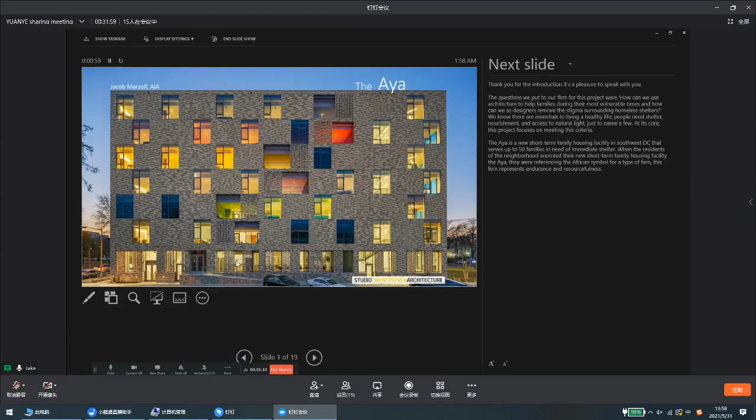The story of the AYA begins back in 2001, when DC General Hospital was closed and converted into a homeless shelter. It served upwards of 270 families each night. The oversized, rundown facility was continually plagued with security and trauma issues.

In 2015, the mayor of DC pledged to close DC General Hospital and open 8 new smaller facilities to collectively combat homelessness. Studies have shown that smaller facilities are more easily supported and integrated into a community, allowing residents access to local resources, including stores, healthcare, and schooling without significant travel or income.

Each facility would serve no more than 50 families, be equipped with all-inclusive services, 24/7 security, and provide a safe environment for families. In 2018, Studio 27 Architecture was awarded the Ward 6 project.

The AYA occupies a historically significant location in Ward 6, falling within the original master plan of Washington, D.C., mapped out by the French military engineer Pierre L'Enfant. The site is bordered by Delaware Avenue, one of the original streets of L'Enfant's plan that radiates diagonally from the U.S. Capitol. The relationship and proximity of the site to the Capitol played a major role in the development of the building's orientation, program distribution, and captured views.

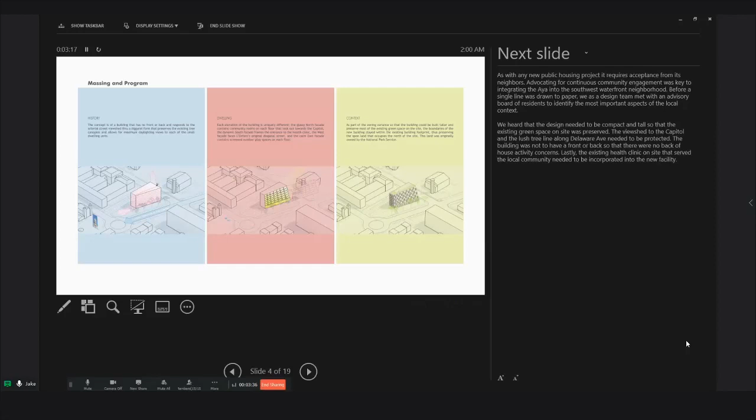We heard that the design needed to be compact, so that the existing green space on site was preserved. The viewshed to the Capitol and the lush tree line along Delaware Avenue needed to be protected. The building was not to have a front or a back, so there were no back-of-house activity concerns. Lastly, the existing health clinic on site that served the local community needed to be incorporated into the new facility.

The early input from the community was extremely beneficial because it gave us a set of rules and guidelines to work from. Instead of starting with a blank slate, we had an inherent framework to aid our decision-making.

We explored several massing concepts that aimed at meeting the criteria set forth by the advisory team. In addition to these rules established, each option looked at different ways of bringing in natural light while creating generous views to the city.

The massing concept that received unanimous approval from the community was a stepped ziggurat form. Each articulated block is a dwelling unit within the building. Each dwelling unit has 2, 3, or 4 beds per room throughout the 50-unit complex.

In these images, you can see the preservation of green space on site with the offset of the building at the north from the existing park, and the erosion of the western facade from the tree canopies along Delaware Avenue. This movement away from the trees results in a triangular footprint that points directly north towards the Capitol.

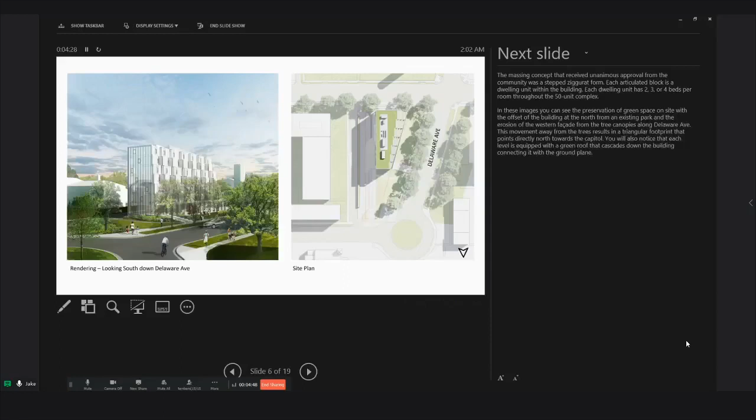You will also notice that each level is equipped with a green roof that cascades down the building, connecting it with the ground.

In the 4 elevations of the building, you'll notice each facade is distinguishably different. This is intentional. To meet the community's goal of not having a front or back to the building, we treated each elevation equally. The moves on each face of the building directly relate to both the program and exterior environment.

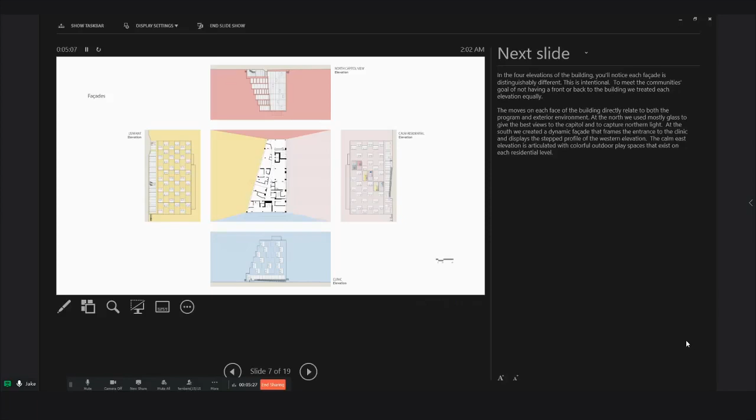At the north, we used mostly glass to give the best views to the Capitol and capture northern light. At the south, we created a dynamic facade that frames the entrance to the clinic and displays the step profile of the western elevation. The calm east elevation is articulated with colorful outdoor play spaces that exist on each residential level.

On the left image, you can see the northern facade, comprised of mostly curtain wall. The spaces at the north end are community rooms that serve each floor. They provide a common space for studying and relaxation.

On the right is a close-up of the western facade where you can see the corners of each dwelling unit. The glass locations alternate from an interior corner on one floor to an exterior corner on the floors above and below. This undulation creates depth at the exterior and makes the rooms feel larger than they are.

Here we are standing in one of the community rooms looking north to the Capitol building. You can see it here through the center casement window.

The height of the building grants some of the best views to the city. This room is equipped with a movable partition that runs down the middle of the space, allowing for separate activities.

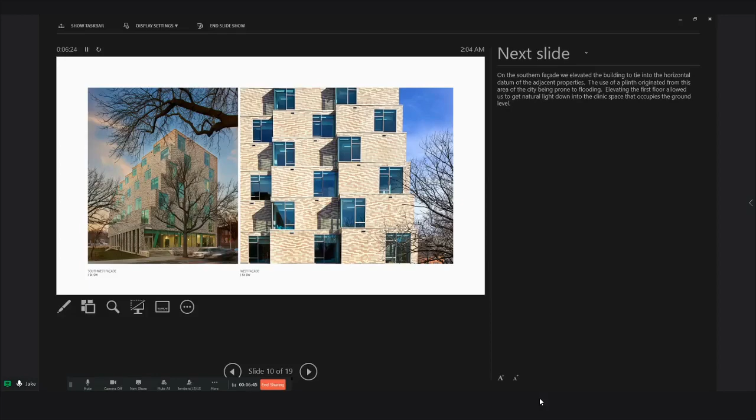On the southern facades, we elevated the building to tie into the horizontal datum of the adjacent properties. The use of a plinth originated in this area of the city being prone to flooding. Elevating the first floor allowed us to get natural light down into the clinic space that occupies the ground level.

We designated an organizing color independent to each floor to foster a sense of community within the building. At night, you can see these colors shining through.

Displayed in the longitudinal and transverse sections here, you can see the clear use of color as an organizer for each floor.

The clinic shown at the top left plan occupies the ground level. The administrative and support spaces for the short-term family housing make up the first level, and the dwelling units reside on the 5 remaining levels above.

The stepped massing from the 2nd to 7th level required a careful study of unit distribution, as there are fewer units as the building grows in elevation.

As mentioned previously, each floor has their own exterior play spaces carved out of the eastern facade. This allows for parents and children to get secure access to the outdoors without having to travel down and out of the building. The outdoor play spaces climb up the east side of the building diagonally from left to right,

drawing your eye north in the direction of the Capitol. The playful use of color is reflected through the openings of the exterior wall.

At each outdoor play space, we use brick screening to provide shade and wire mesh to provide safety. Each room has a colorful rubberized floor, stucco walls, and a glass partition along the western side that allows for natural light to reach each corridor.

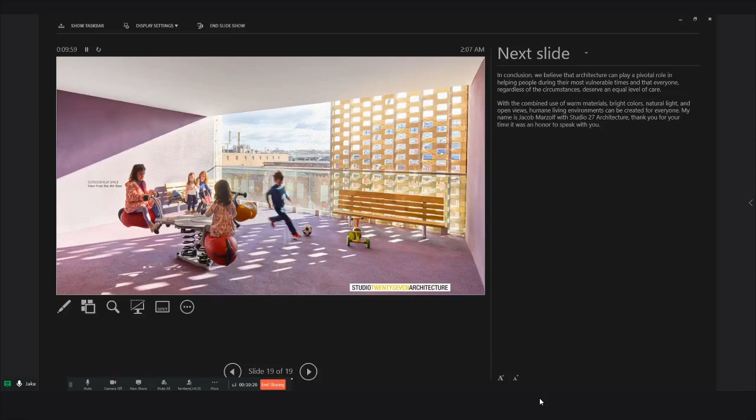Thank you, Jake. It's a very interesting presentation. I like the zigzag shape. It's perfectly fit into the site and creates very diverse public space. It's amazing projects. So let's welcome the second speaker.

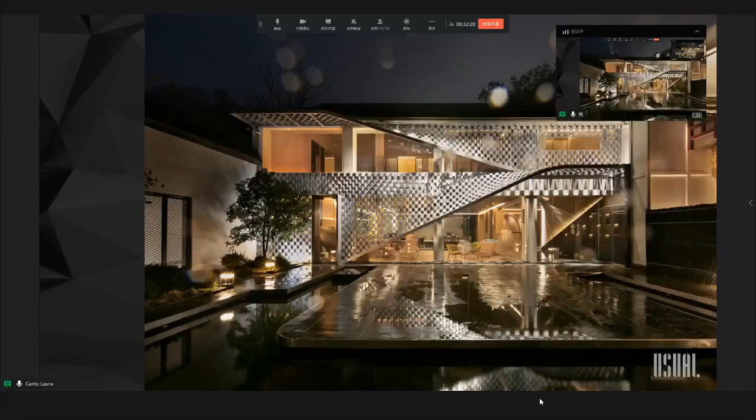So the flooring tiles are extended from the original tile roof to the whole facade. The new facade can be perceived from both the inside and outside space.

The facade works like a curtain, and at some points it's gently lifted, so the outdoor and indoor can resonate with each other. This is the facade image we generated, a half concealed, half revealed facade.

Walking through this exhibition hall, it feels like being in nature. This transparent floor-to-ceiling glass connects the outdoor landscape with the indoor space, and also this translucent

facade skin, composed of flooring tiles, filters the light from the southwest and also plays a role in shading. The interior is full of light and shadows, contrast and change. This was the intention of the design, that the sunlight and the scenery can blend and gather together

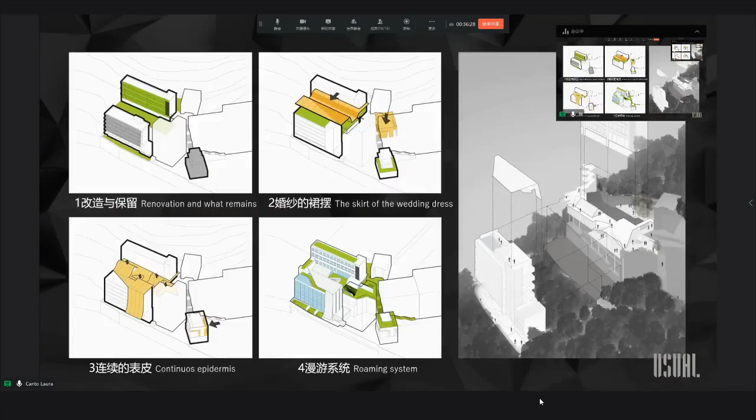give them a totally new look. These are some sketches of the concept, some diagrams showing how we generated the design. This is the entrance, which has become one of the most popular influencer hotspots.

There are some 3D printing models, and the lobby, the water yard, and the multi-purpose auditorium. And I think I'm off time, right?

So I will be quick. The other areas from this project, and the aerial view from the drone. These are some of the rooms that face the Yangtze River, and the rooftop cafe bar, the infinity pool, and some of the...

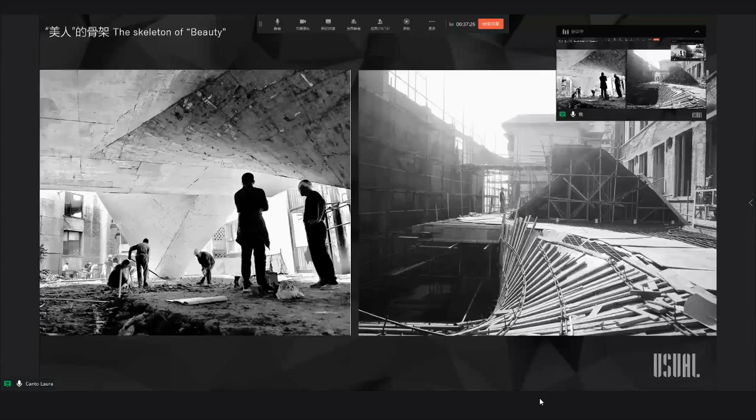I would like to have more time to explain this project better. The construction drawings, and below. Yes, thank you.

Thank you, Laura. It's a very nice presentation, very elegant design. I saw some of your work on the internet - it's quite internet celebrity, so I think it's interesting. I like your approach of using, for me, an unusual way to achieve a usual life. Yeah, maybe we can discuss later.

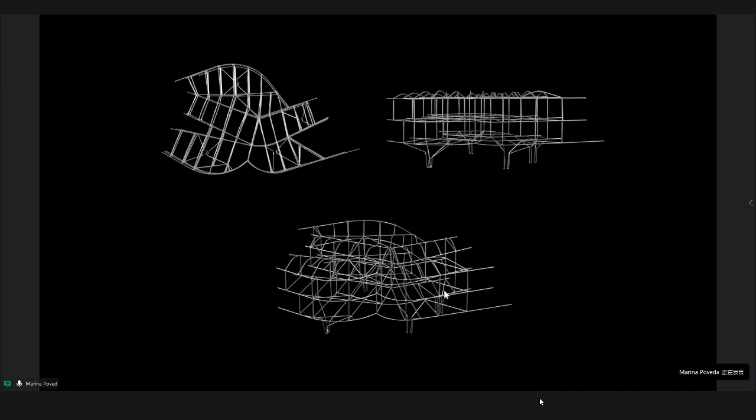Let's talk about the plot. Let's talk about the conditions and requirements of the client, and then let's see how the house ends up being. So let's think about the clients first. This is the house of two doctors who work in Besalú, a very small village in Catalonia.

The two doctors wanted the house to be approximately 200 square meters. They worked there and lived there, so they were not supposed to use cars to move around because it was a small village. I'm saying this because it has something to do with the whole project. I'm also mentioning the clients because their requirements were very important for the development of the project.

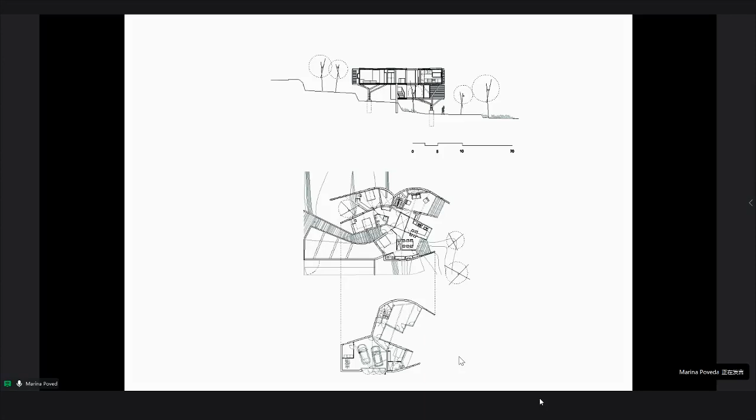Let's see this through models. This condition of the one-floor house had to follow a logical structure made of pillars. In this kind of model you can see the house, the way it searches the street and the village, and then it opens and flies over the terrain, just to be visually connected with the river, even if it's not literally connected with nature, with the ground.

Of course, this structure needed to be made with pillars, but it's true it has a mixed structure. Structural walls are used as well as reinforced concrete and steel pillars, and both of them were necessary.

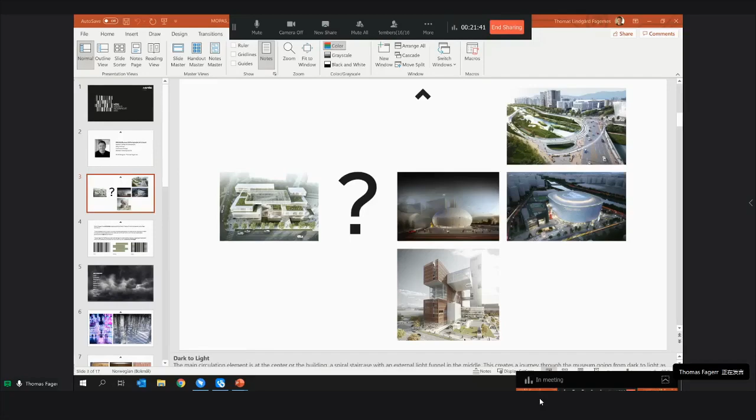Our initial thoughts were, should we compete with these buildings through shape, or should we do something else? That was our initial conceptual start, that we should not work with form here, we should work with light. Since this is a museum for photography, it is a story about light.

So we made a vocabulary directly connected to light, with expressions like contrast, reflection, blur. Blur became very important while we worked with this competition, and also the idea of a filter.

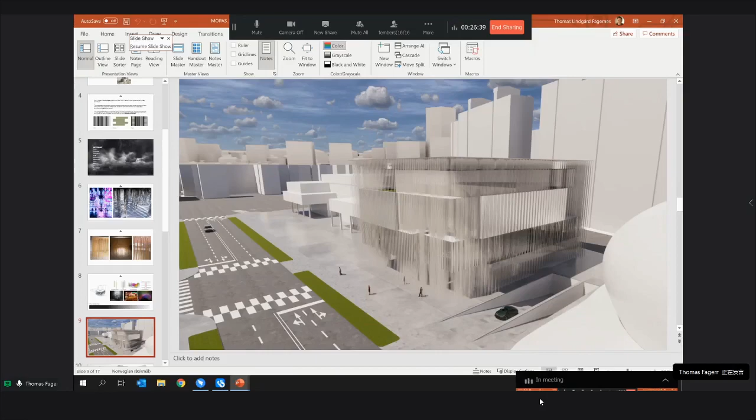So what we're seeing here is a sketch of the building as it turned out. We see then the programmatic part sort of inside this blurred volume of, I think it was 2,500 slim columns. And this is a more developed rendering.

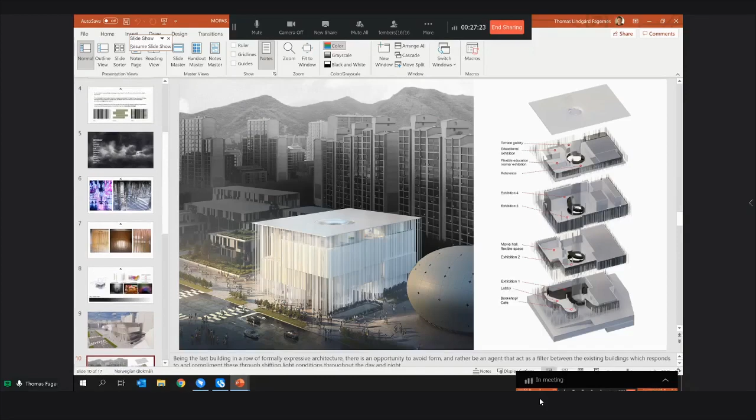Yeah, so here is the ground floor plan, where that funnel on the ground floor was an external space which connected this museum to the museum next door, which is this museum for robotics.

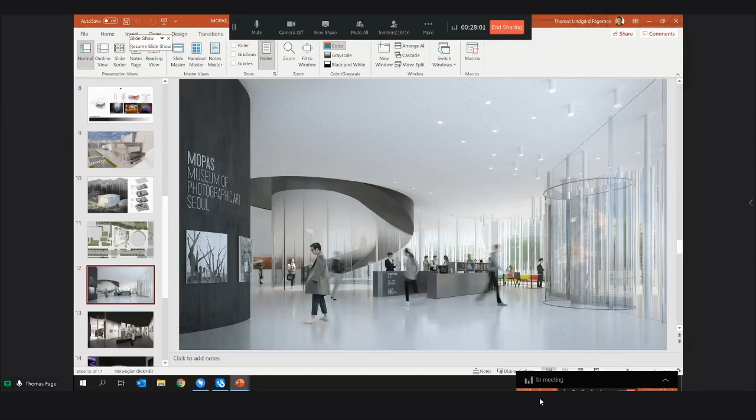And here we have an image of the entrance where we see the funnel coming down with the stair wrapping up around it. Right behind here we have the first gallery, so that's our black and white gallery on the ground floor, the low intensity of light gallery.

And as we get up on the second and third floor, we reach the digital content library, so intensity of light goes up and the intensity of the expression of the medium goes up.

And here we're on the top. It's light, it's bright, and these are student exhibitions and study halls, studios, and also a library dedicated to medium.

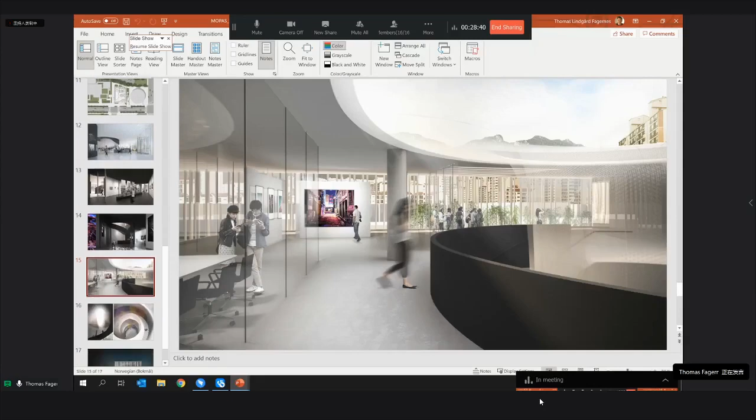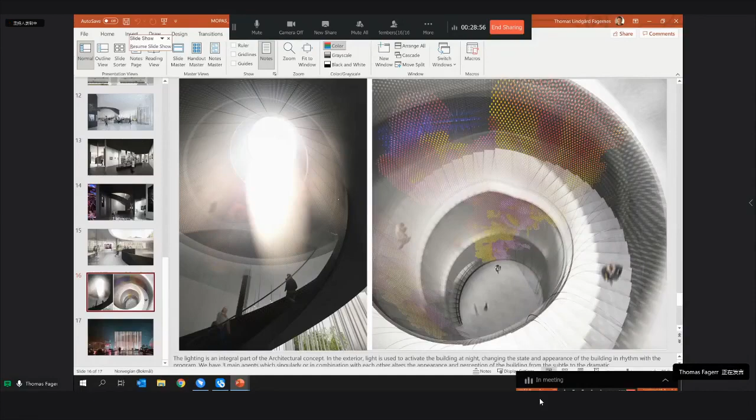And an image of this central funnel here, where Lichtvision also developed an inbuilt screen in the glazing, the inside of this funnel. And finally, this is our vision of this building at night, actually lit up by the columns and this three-dimensional screen by the entrance.

That was my last slide. I'm not sure if I've overrun my time.

Yeah, it's perfect. Thank you for your sharing. I think it's very good work to study, how the building works like a mediator between the city and the people. How actually architecture becomes more like a device, not purely like a building itself.

Maybe in future you can bring this idea to China to find a place to implement it. It's a good opportunity. More than happy to. All right, thank you very much.

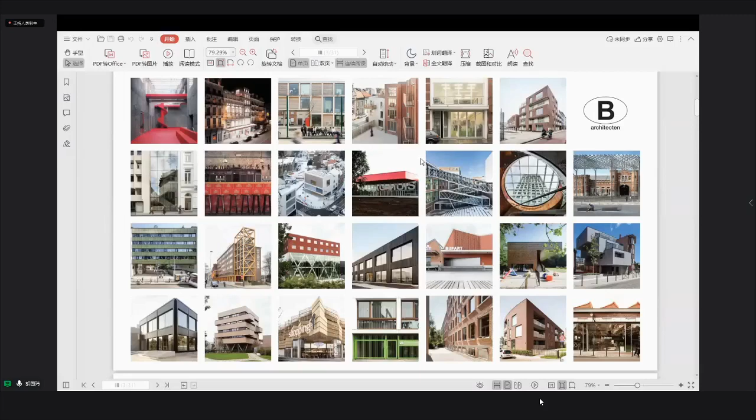You could say next, I will play the next slide. Okay, next one. We cannot hear you. Anthony, there's no problem, you just give a speech, I will follow your step. Okay, which one is okay? Yeah, it's okay. Please give the speech. We can only see your screen but we cannot hear you. It's you give the speech, and I play the slide. You say next slide, I will play the next slide, okay? So the next one? We start from here? Yes.

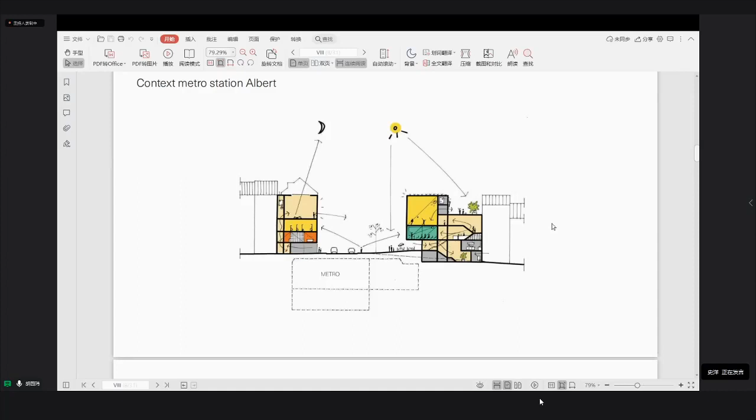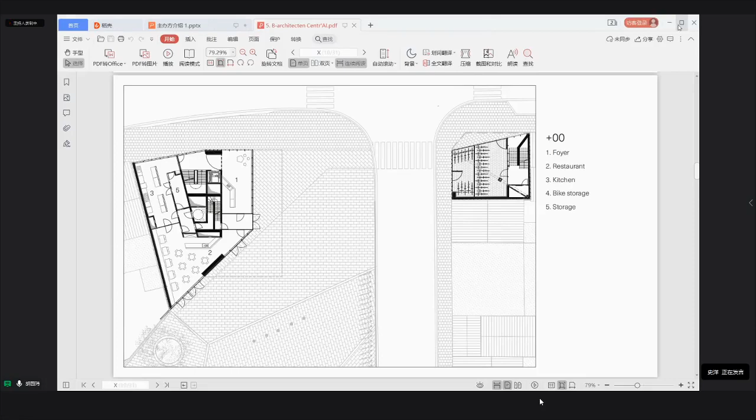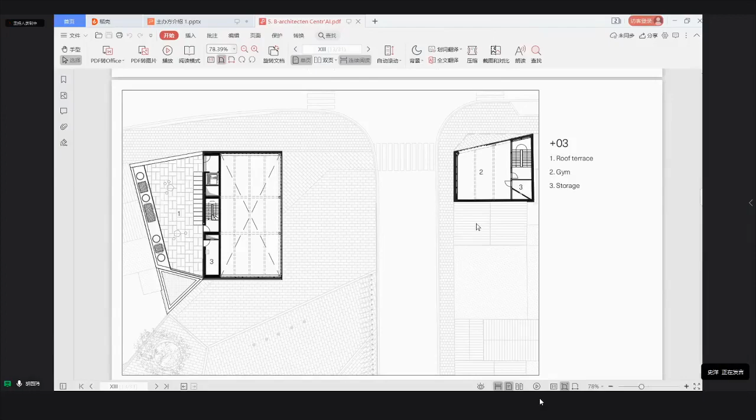On number 1 is the roof terrace. We saw it on the previous slide, and the next one.

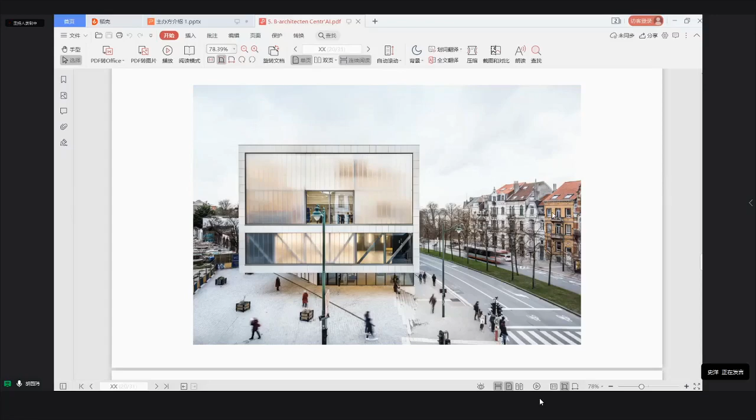I really like this image showing the diagonal connection between the back road and the crossing road, and this card also creates more public event for the crossing road. Okay, next one.

This is the cantilever structure. Next one.

Also like this one, like a city window, the surrounding facade made by the semi-transparent glass, the U-shaped glass, and the center one made by transparent glass. So we could see these two different blurry transparency qualities.

This window also brings the city landscape into the interior. This is also a very nice technique. Okay, next one.

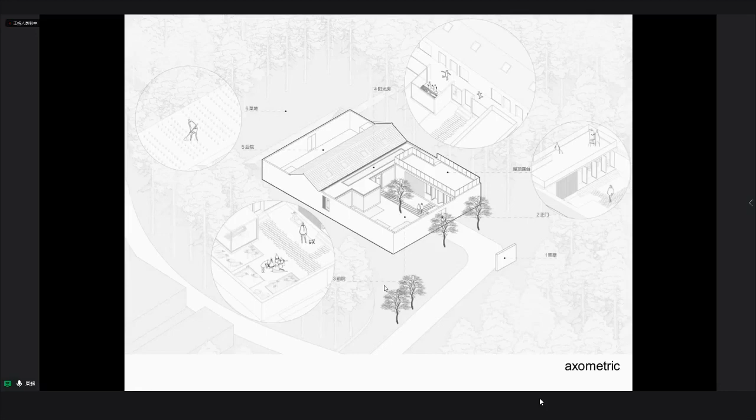In the whole design, I'm still thinking one question. Although the limit is very strict, how can we renovate the house from inside, and how can we coexist with the environment very smartly?

Because the old house is L-shaped, the new one is still L-shaped, but it's a different change. The east-to-west volume consists of 3 bedrooms and study rooms. The north-to-south volume consists of the kitchen, dining room, and storage. Furthermore, we add a wide corridor to connect the 2 volumes, which we call the sunroom.

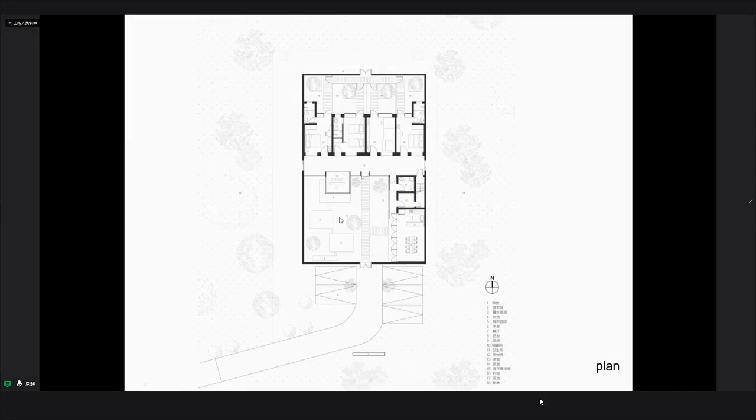The second part is the courtyard. There is a courtyard in the old house, but we cannot destroy or rebuild it. I call it just the extension of the building. In this new house, the building and the courtyard wall are a harmonious unity. In the traditional courtyard, the wall and the building are separated, but now we connected them together. This is the front courtyard, and this is the backyard.

In the front courtyard, we add 3 pools to connect the courtyard. And we add a waterfall from the wall, and the water passes through the 3 pools, and finally hides under the tea house. This is very interesting. In the Chinese poem, we call it the winding river.

And in the backyard, we just plant trees. This is the courtyard, and we weave the bricks to make the light and shadows. This is the courtyard, and this is the backyard.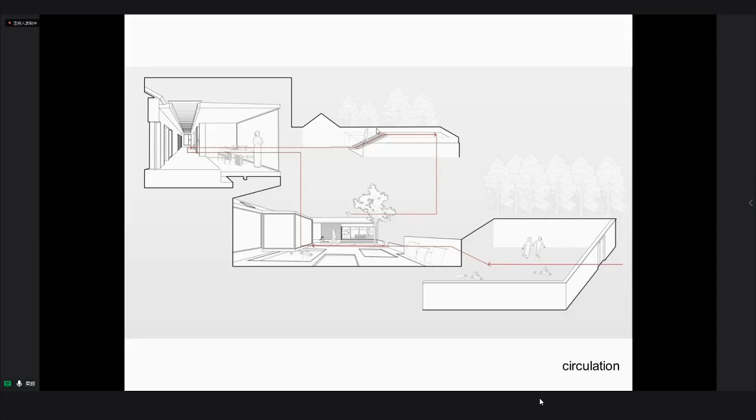Through the connection of the courtyard, we found the circulation will become more fun, from the front yard to the backyard and to the roof terrace. The circulation will elongate. So with the beautiful scenery and the light and shadow, the circulation will become more and more interesting, and the scenery will become more colorful. It's the detail of the roof terrace.

And then is sound. I want to emphasize the sound because there is great noise from the expressway, but our solution is to quiet the noise. This is very clear in this diagram - you can see the expressway is no more than 50 meters from the bedroom. So how can we reduce the noise?

We take two measures. One is the plants and trees to prevent the noise. The second one is the tea room and the double glazing glass. Furthermore, we add the wood floor, as I mentioned before.

This is very interesting because the inspiration is from Japan. I still remember when I visited the Garden of Fine Arts in Kyoto, the water flow in the sunken garden reduced the bustle and hustle of the cars on the roads. So we just tried the same strategy in this house.

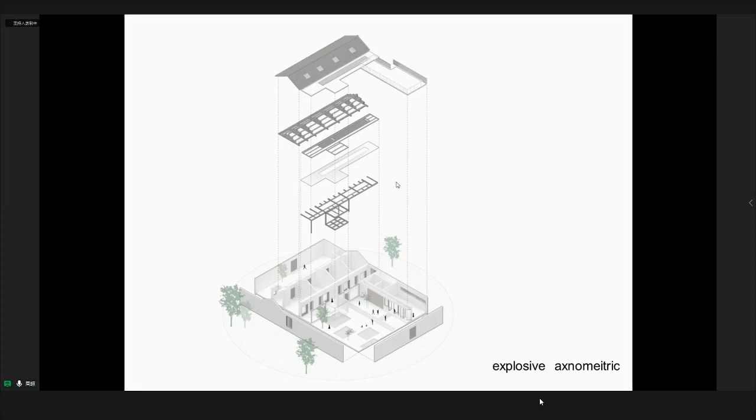Then construction. Because the old house is constructed by wood and brick, we just follow it. But for the sunroom, we use a steel structure. It's just a mixture. The owner invited a 70-year-old carpenter to rebuild the timber roof with mortise and tenons.

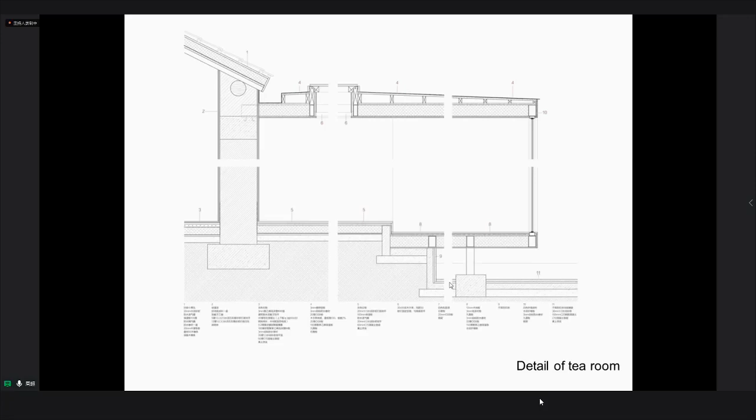It's cheap, but it works well. I want to say during the construction, it was the pandemic of COVID-19. The owner invited us to have a small construction team from Wuhan, and the owner participated in the whole construction. So this building was completed within 5 months. It's a very unforgettable experience.

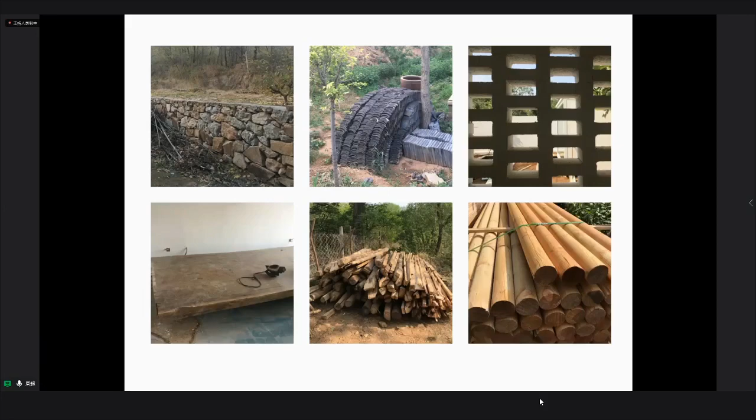Finally, I want to talk about the materials. The strategy is recycling and reuse, because the old materials preserve the emotion and the history of the owner. So we collected and recycled them, such as the stone foundation, the tiles, the bricks, the wood, and the timber. On one hand, we use it in the building. On the other hand, we use the tiles in the landscape. We use the timbers to make furniture. So you can see the history and the emotion we built into this building.

I want to give a brief introduction to the village in mixture. I call it village in mixture. This shows one of the projects we finished in the countryside in recent years. We have a vision that we want to translate the Chinese tradition.

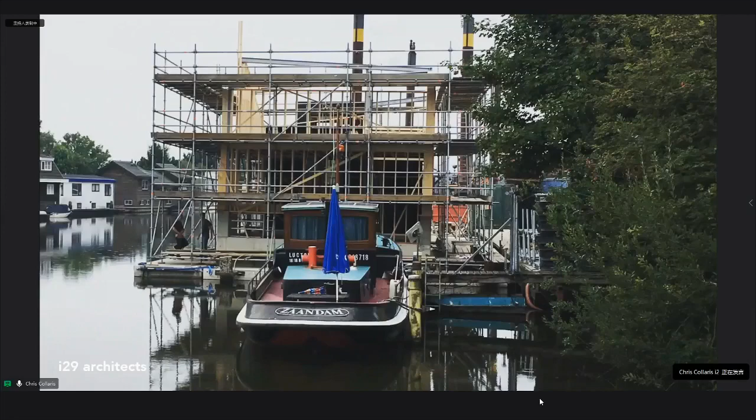And if you want to live on the water, you can choose to build it on the water or build it on the land. We built two of those floating homes. One we built on the land, and then after you finish, you put it into the water, and then it's always a big gamble - is it still floating?

Is it going the right way?

But this one, the floating home that I'm showing you today, it was such a complex shape and also in terms of balance that we had to build it on the water. It was also the first floating home that our contractor built in his life.

So when you build on the water, you can always juggle a little bit around. You have a design, but you can still improvise if things are not going right as you had thought on the drawing table. Luckily, we built this whole thing without any balancing problems, but we were quite surprised that there is so much possible with this kind of structure floating on the water, because one of the biggest complexity issues was the shape.

We had to make a house, both a home, but then with a pitch roof. We didn't want it to be such a simple home. That meant we wanted to make a pitch roof, but then we turned the pitch roof diagonal on the floor plan. It gave also a very interesting part on the inside, but on the outside as well, because when you go with your little boat around, this house looks always different from every different angle.

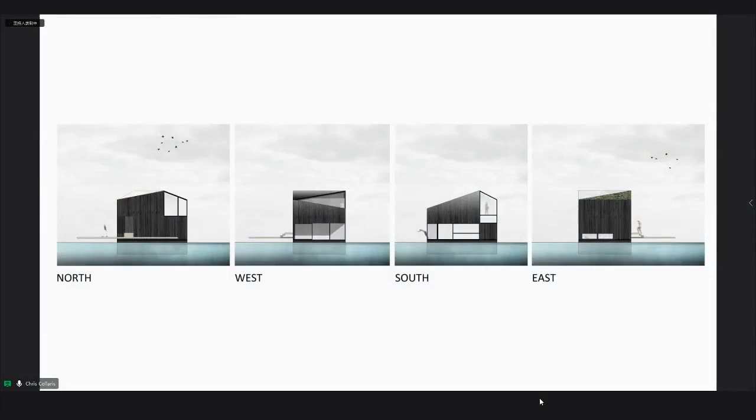Here you see it also a little bit with the facades. The other complexity was that we wanted to give the client much more than he wished for, because we wanted to give them a lot of space and also a big feeling of space. That meant we wanted to connect a lot of spaces together in one piece.

But if you're going to do that on a floating structure, you have to keep your balance. So if you make a big hole in the floor on the left side of the floating structure, you have to think about something else on the other end. This interior and this whole setup of the house is going completely crazy in terms of balance, so it was a big struggle to get things right, because everything changed every moment. The structure had to change and adapt to this balance method of getting the right balance in the end.

What you see here are the pictures of the end situation, of course: big kitchen and big roof lights, and views to different kinds of directions. The pitch roofs from the areas come back again in the interior, and here you see also the inside-outside space, which is flowing into each other.

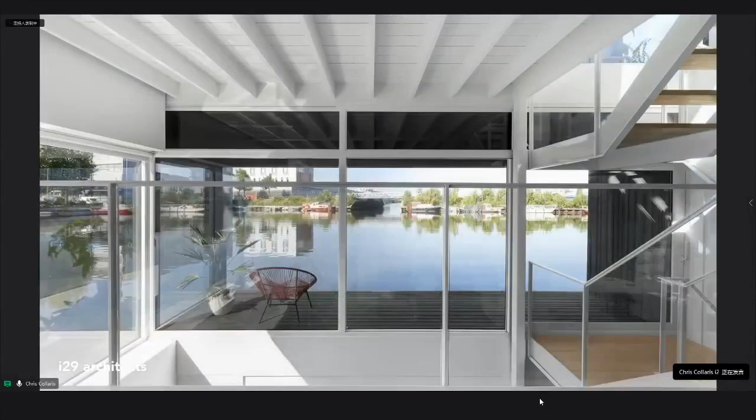A funny thing is that we directed the views. So this is the view that you get when you sit on the couch in the living room, but if you stand, you only get the water view. Every time you walk or move through this house, you get a different kind of view - it's like an adventure to go inside this house.

And of course, a lot of terraces where you can jump just right into the water. Because why do you want to have a floating home? You want to be very close to the water, but you also want to be in the water.

This then is the front facade on the west side. As the ending point of this presentation, we have a very short movie about the first batches of houses coming to the jetty.

Because if you think, 'oh, we're going to do it,' and you only think half about doing it, then it's never going to happen. It's only happened because those people were able to go for it.

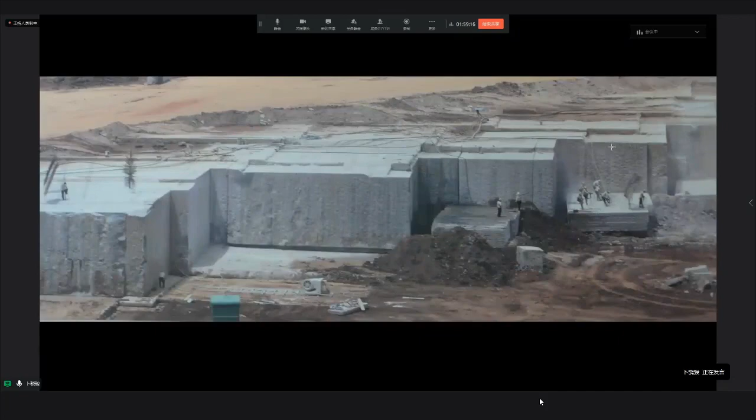So the story of the architecture starts from 6 years ago. YINGLIANG Stone Group found us to build a small stone showroom in Beijing. We were interested in the stone quarry, and they gave us a lot of stone mining techniques.

Inspired by that, we developed a new language of splitting space, and we used the recycled stone, the skin of the mountain, as an architectural material, and that was the final look of the exhibition space. So the recycled stone was cut into 10 centimeter blocks and generates new facade. We use that stone as an interface between the void space and the functional space.

After that, 3 years ago, the upper industry group, YINGLIANG Stone Group in Xiamen, found us again to build up a museum. Within the communication, they gave us more and more information about the industry, so we got more and more interested in that area.

So we saw a lot of labor. We saw the conquering power between human and nature. So that was the very primary instinct that drove us to move on in the design aspect.

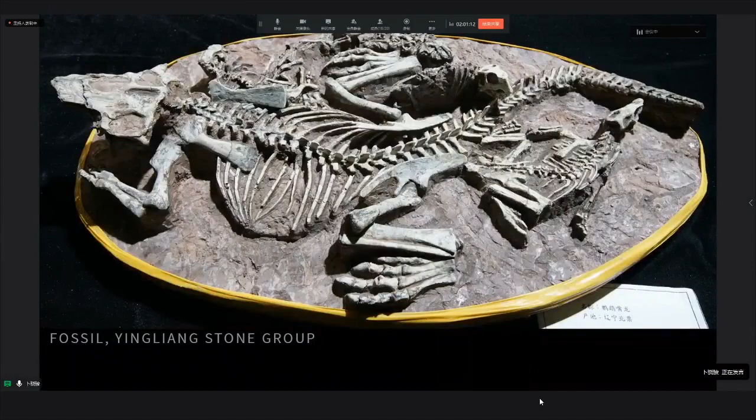So they gave us more material like fossils and gems, crystals, and they have a specialist team to dive in the fossil collection.

This office building has a very opaque facade that has a huge atrium. After analysis, we found out that there are 3 main difficulties that we need to conquer: the conflict between public and private space, the lack of natural lighting, and there's no community space in that building.

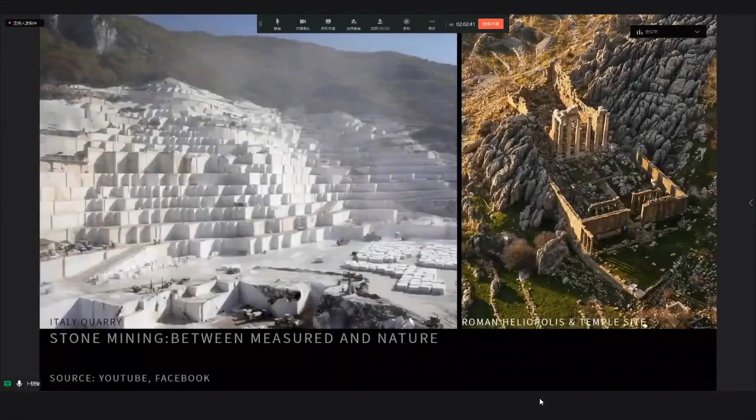So we tried to develop a new language from the stone dissection. Our design departs from the unique architectonic latent within the stone dissection technique during the stone mining process. We cut through the remodeled space within the method of stone dissection and create a unique stone gallery. The stone industry is about a battle between nature and human.

Can we go back to the last two? The last slide. This is the Roman Heliopolis and temple site in Lebanon. We can see the juxtaposition of natural stone and architectural stone, and that's very interesting for us.

There's a leverage in the process of stone cutting. We use comparably small tools to cut gigantic stones by finding the weak points in natural stone and helping stone to crack naturally.

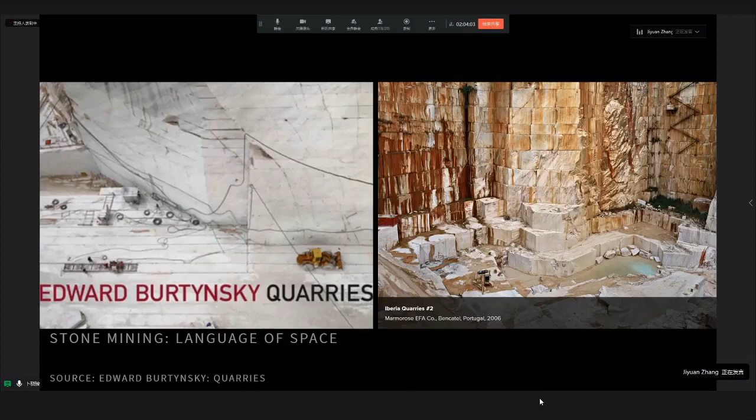We also found the composite structure in the micro level of the crystallines are very similar to the macro scale composite structure in the geotectonic of mountains.

So during mining, the mountains are cut from cleavage planes vertically and bedding planes horizontally. We tried to figure out a relation between the micro-scale crystal structure and the macro-scale geotectonic structure.

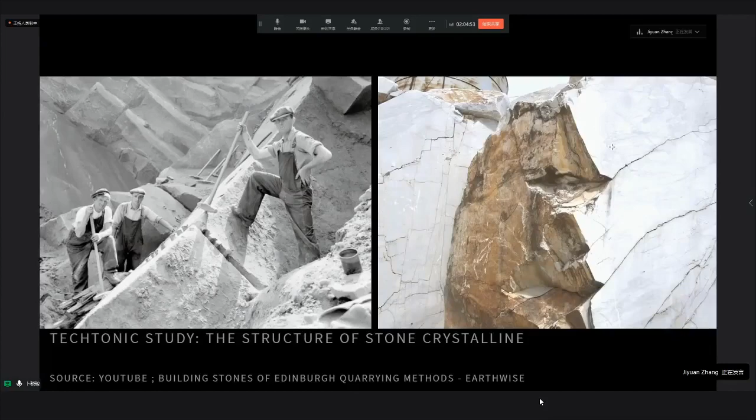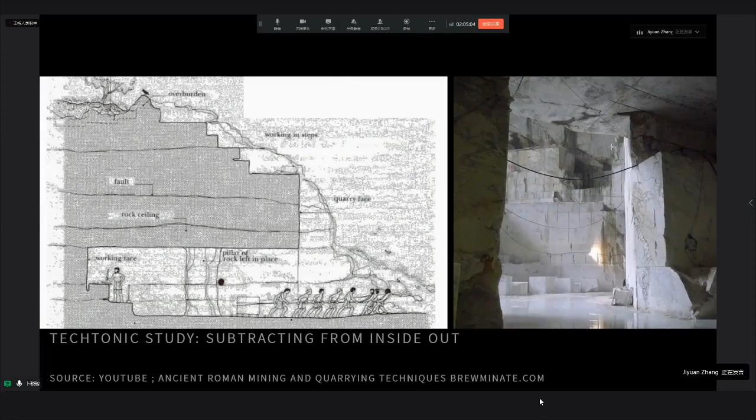The mass of the mountain is subtracted or scooped from inside out. This is very interesting for us, that natural architecture is created from its very interior, and the exterior becomes a formal expression generated from the process of the interior, rather than the other way around.

The rope saw or other splitting techniques always generate a slightly tilted cutting surface, which forms a perfect and abstract measure of nature. So the modern and traditional cutting methods all create slightly tilted straight surfaces.

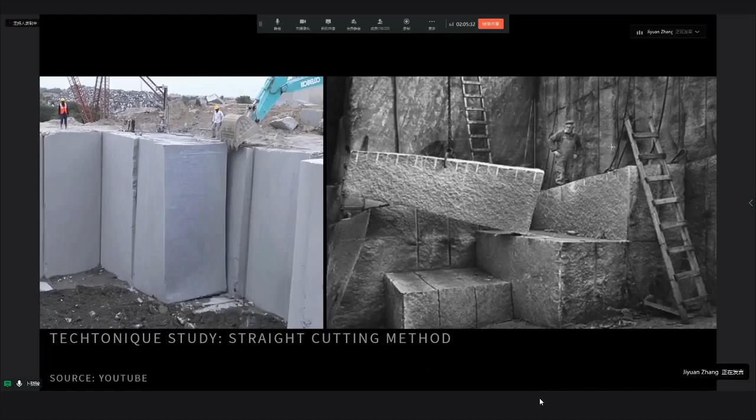Considering the limitation of the site, we found that the skylight atrium could solve the problem we face on the site. We need to find a way to divide the skylight for the museum and the office. So we begin with understanding the underlying structure of the skylight atrium.

At the end, we introduced 3 vertical tapered cylinders into the space. In one way, we introduced skylights down below to the first floor as a skylight contributing to the museum atrium. The outside surface of the cylinder reflects light back to the office space.

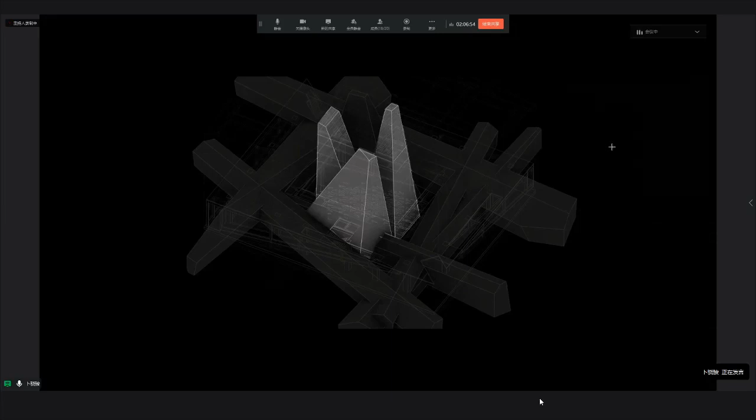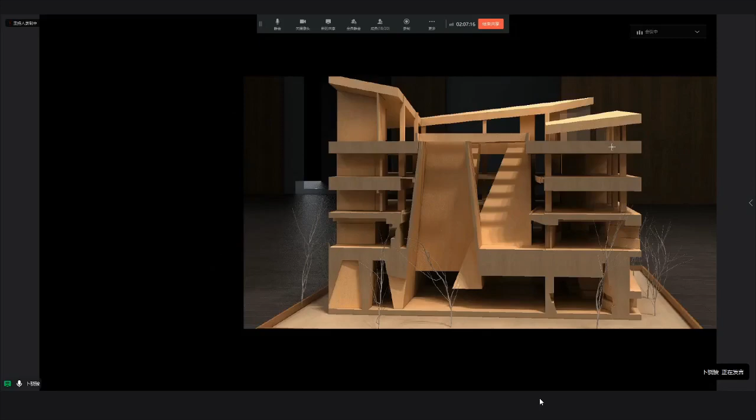We thought at that moment that was very clever, that when the confliction between public and private space becomes a problem, that way it can split the two spaces functionally. So we confirmed that option and moved on, which also combined all the stone cutting technology and tectonics, and the idea of crystal shape into the space, shaping it into a crystal-looking atrium.

So this is a photo showing how bright the skylights reflect back to the office space. That's the top part of the space, and this is the bottom part of the cylinder. You can still feel the very primitive feeling of the cave, the crystal cave, happening in the space.

So all the cutting surfaces start to stir up the space, with all the tilted angled surfaces. The floating volume between all the cylinders gives a sense of gravity, and also the huge vertical scale gives a sense of a primary cave space.

At the end, we used a bundle-shaped horizontal crystal volume surrounding the central space as exhibition space. So that's the final look of the interior.

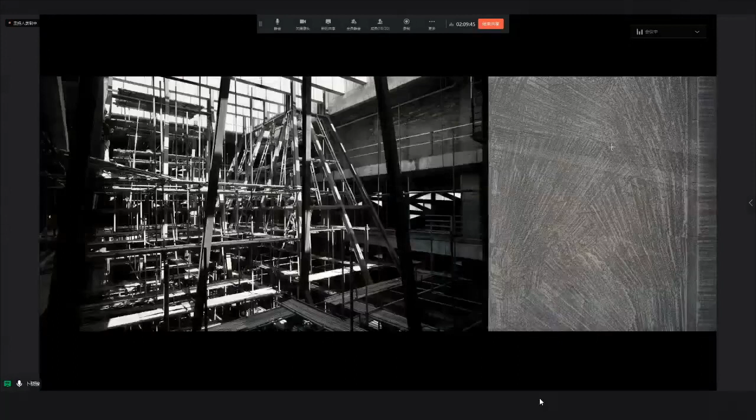So at the end, all the effort we were trying to make was to get inspired by the industrial, which addresses the power of human. We have a very short, about 1 minute, animation to show everybody.

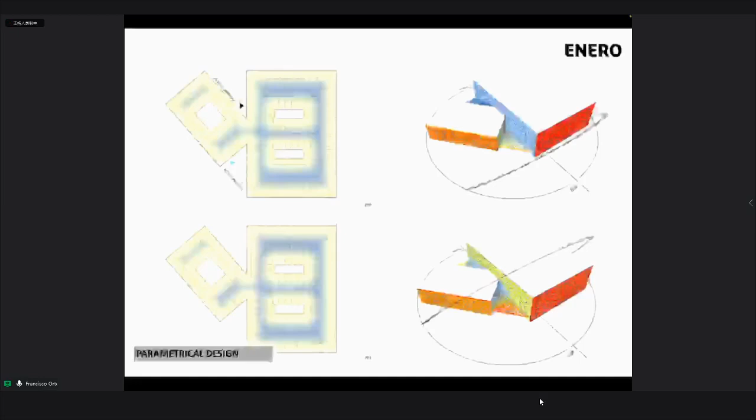We also wanted to pay homage to the Islamic architectural period, so we built a facade of 2 layers, the outside one based on the idea of a mashrabiya, a lattice work typical in Islamic architecture. These mashrabiyas not only protect from direct sunlight but also provide privacy inside the building. With these 2 parameters, we designed a parametric system for keeping direct sunlight out year-round while preserving privacy. We used algorithms based on triangles ranging from 0% to 100% opacity, combining them to give the building shade while creating a vibrant facade—giving shade not only on the facade but also at the main entrance, as you may see in these images.

We also wanted to help with wayfinding, so instead of pillars, we used tree-shaped pillars made of steel.

And at night, you may see from the inside how the different layers are, letting the light come out.

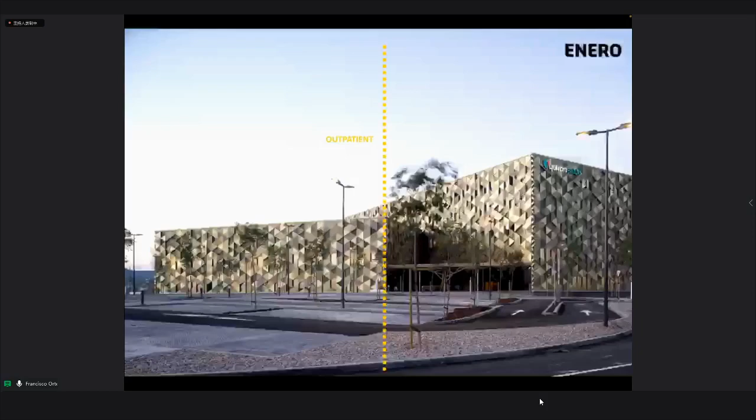The building is divided into volumes. The small one is for outpatients, and the big one is for inpatients. In the intersection between these volumes, we created the main entrance, in the front part, and also the emergency department entrance in the rear part of the building.

So basically, what we have here is offices and clinics, which is our area for the outpatients on one side, an emergency department and diagnostic department on the ground floor, operating theaters and ICUs on the first floor. Then we have an entire floor for facilities and services, only for internal use. The third and fourth floors are for the wards around a big patio.

The flows and circulations in a hospital have to be very clear, and public circulation and internal circulation should never merge. That is why on the ground floor, once you enter the lobby or the emergency department, to the left you have all the public services, and to the right you have all the internal areas.

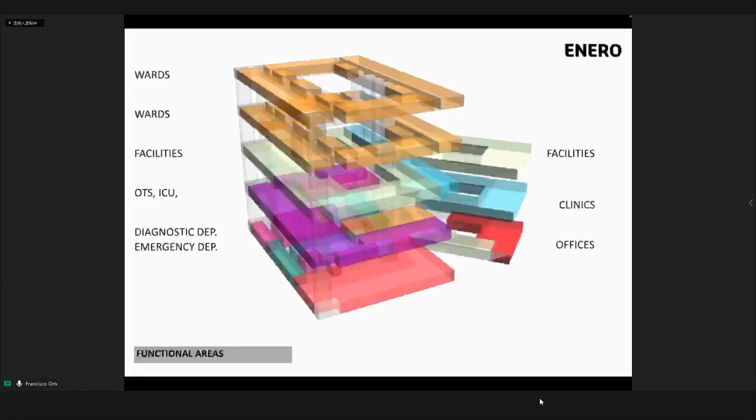Most of them are illuminated either from the facade or from the internal patios. On the first floor, we have the clinics where all rooms face the facade, giving direct daylight and views to the outside. On the right, the operating theaters also face the facade, so patients can have views outside and direct sunlight if required.

On the third and fourth floors, we have the wards. They all face the outside, so even though we keep privacy with a second layer, they have views to the outside and direct sunlight. The internal areas face the big patio, where we place the staff, nurse, and support units.

We also made a modular building based on a framework of 7.2 by 7.2, because we think it's the most efficient concrete framework in terms of cost and speed. So we designed all the units with this module: rooms, boxes, clinics, endoscopies — all designed within this module.

In the interior, we wanted to keep as much daylight as possible, that's why we use windows as well as roof lights. I'd also like to highlight that we use organic materials such as wood or stone. We use this structure as an abstraction of trees instead of pillars, and we like to use views in the public areas to give a welcoming feeling to the patients.

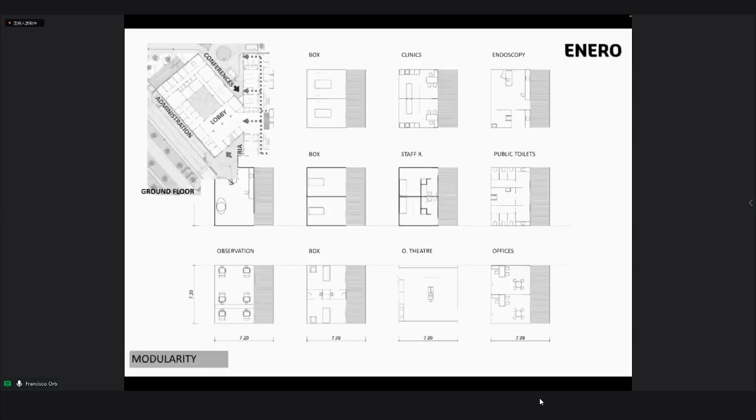In the clinic areas, we use roof lights as well as glass partition walls to let light come through the inner areas. So we would say almost 80% of the building is illuminated by daylight.

You can see a picture of the operating theaters with windows that can be opened to let the patient see outside and have views if required.

This is an example of the ICU unit. Now the blinds are closed, but they may also receive direct daylight if they want to. And you may see on the right the glass partition walls in the clinic area.

Now I will present a 10-second time-lapse of the construction of the building.

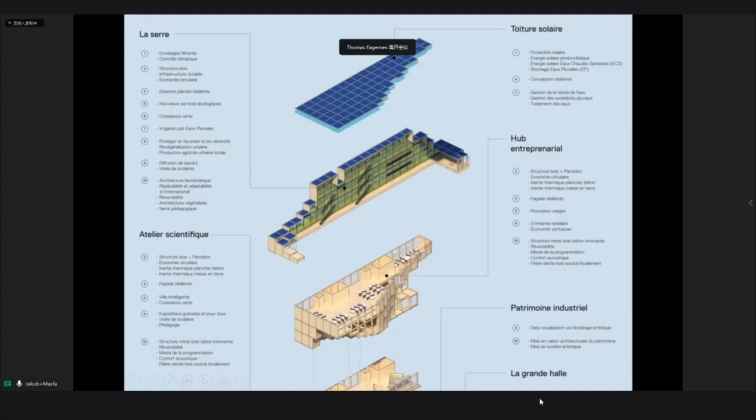So I'll go on a bit to images. Here you have an idea of the roof, from the solar roof down, through the wall and to the different pieces, giving some idea of the existing concrete structure.

A restaurant backed by a social reintegration initiative will provide a welcoming meeting place. This is what we're calling the energy pixel, essentially a solar cell, a wooden wall filled with dirt recuperated from Paris's new Grand Paris Express, an underground and above-ground expressway, along with a green growing wall.

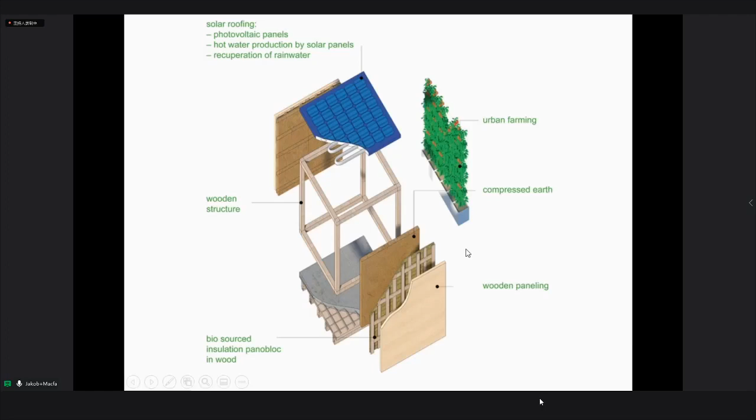The clients for the building are EDF, a French electric utility company, and RAM. The Energy Plug was a winning project in the C40 competitions, in which 9 cities across the globe had identified a total of 49 underutilized sites designated for ecologically orientated redevelopment.

Here you get a little bit of an idea. I'm going to just take you around the project.

The solar roof. The wood is essentially fabricated out of a product called Kerto, which is a development on a much higher tech development in wood in Europe, from what used to be layers of wood, much thicker. Now we're down to dimensions which are extremely interesting.

Within it, there's a series of offices, spaces, cultural spaces, startups which are invested in the project. In the base is a cafe, restaurant. We have here a very big space, meant to be open for community sports facility, but also could be invested by different groups, artists, etc. over time.

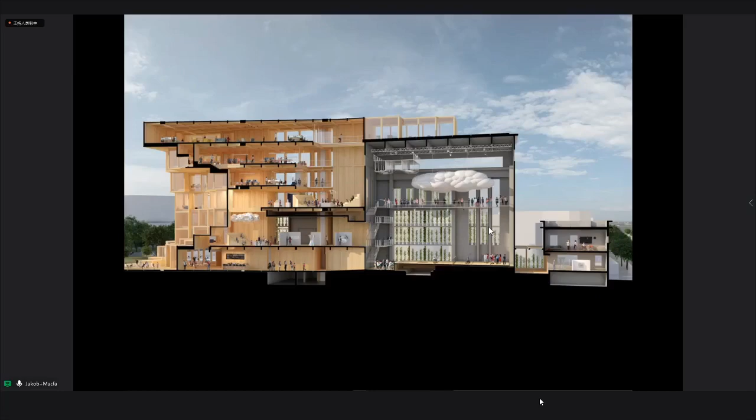This gives you some idea of the section. Here we have the cathedral space. Here we have the growing wall in the back, which we're developing with one of France's more exciting vertical urban agricultural groups. The series of spaces in through section.

We move around now on a model, giving you an idea as we move towards the back. This is the south-facing wall, which we see as a kind of prototype, a prototype for actually any disused industrial building in the world. Again, it's something which can accommodate any site.

So the project is not a singular project. It's a project which proposes a future where we can take back parts of the cities which have been abandoned, disused, but we're no longer interested in demolishing these kinds of structures. What we're interested in is actually taking them back and using them, creating a kind of win-win situation out of them.

The wall generates so much thermal mass that we can actually inject into the old concrete structure what we need climatically. What was interesting about this was to get rid of thermal layers, put back inside the old structure in order to bring them up to livable, workable spaces.

We can now work with the concrete wall as a singular body, and take from this vertical growing wall two things. One is obviously food, but the other is creating a kind of win-win situation for the old factory space, which is taken back.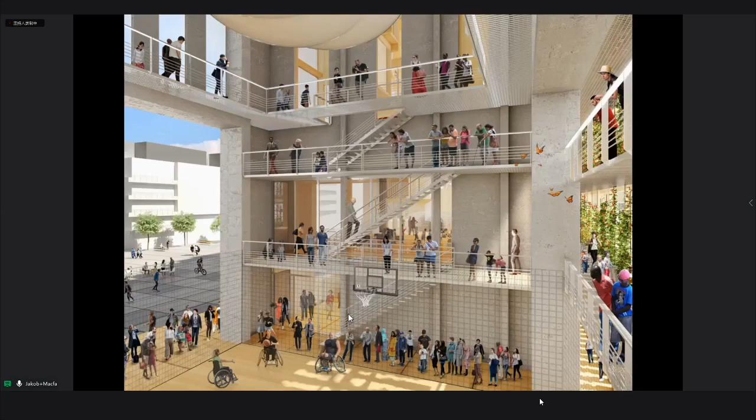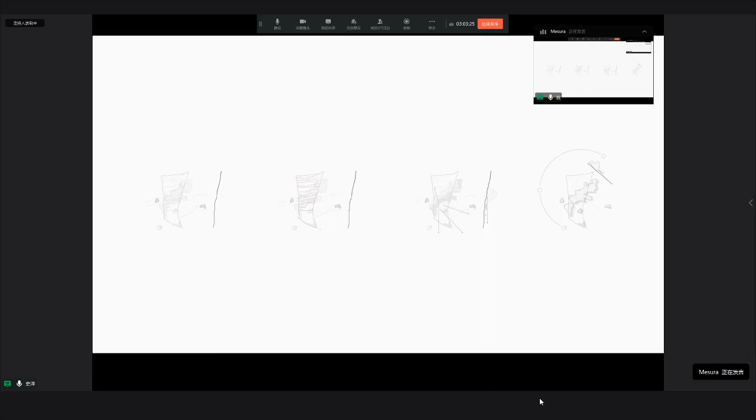If you go to the next image, these are the first sketches and first intentions of how to approach the idea of Genius Loci in our project, thinking of local ways of construction with ceramic, such as what we call the Catalan vault, a vault made with ceramic. In this diagram, we see the house itself.

It's an L-shaped house which perfectly divides what we call the public areas of the house from the more private rooms. Then, in the middle of these two ways of living in the house, we have a straight tongue that runs along the side, turning into a swimming pool on one end, and on the other side turning into a living space in the south part of the house.

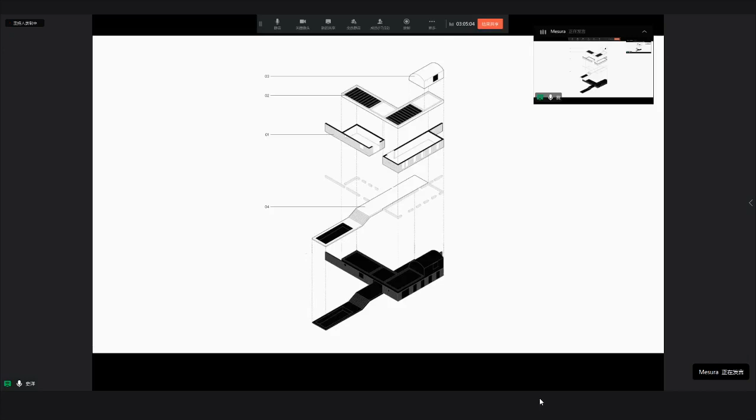So we went quite radical in terms of how to apply ceramic into the house, wanting it to solve all parts of the house, the structure and the finishes. We have four ways of using ceramic locally. One is the wall structure, brick walls. Second is the vaulted ceramic in the first slab. Third is on the first floor, where we have the Catalan vault for the master bedroom. And the fourth application is the pavement and finishes of the house.

So if we go specifically to the brick, we see this detail of the house where we have two walls. The first one is a structure, the second one is just like a skin for protection, combining the brick with this horizontal ceramic element that's doing a few things.

The first thing is it's giving shade to the facade. In terms of sustainability, the first main concept is working with local materials, but the second approach is to understand the climate and do passive architecture solutions, like putting horizontal lines on the facade to give shade so it doesn't heat too much, and it also gives the house image a lot of horizontality so that the house feels settled down in the place.

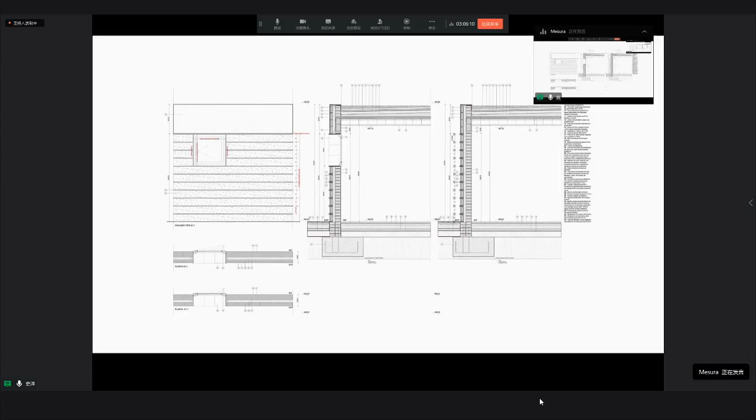Here you see the application of this brick wall on the left hand, and on the right hand the final image of these horizontal ceramic lines. At some point the walls extend the house and interact with the landscape just to make the house feel more settled, and also to limit spaces.

In terms of the slab, we have different directions depending on how the wall is working. We were always working with a module of 6x6, so we don't have big structure elements or normal prefabricated elements. Here we see the combination of little vaults and plain ceramic elements in the tongue that connects the south and north of the house.

Here we see all the combination of the ceramics. On the left hand is where we were constructing it, and on the right hand we have a final image where the ceramic is like the main protagonist element of the house in many ways it's being used.

Then we have the Catalan vault, which is a classical element that we wanted to reinvent and give a new shape adapting to our project, but it's constructed in a traditional way, and that gives a lot of local personality to this space.

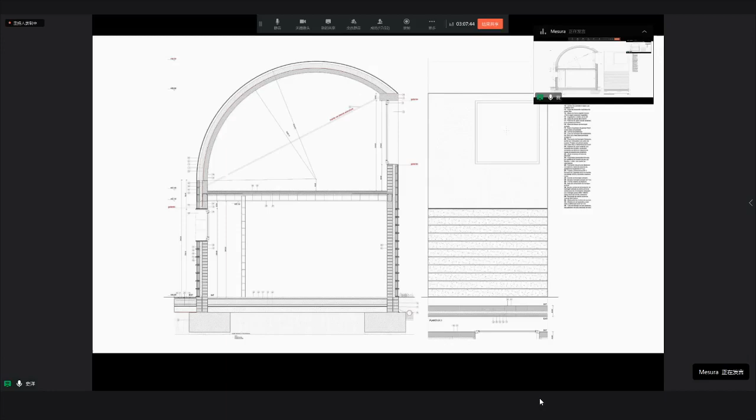It's this element here made with this local classical ceramic way in different layers, and that gives this image on the right hand, also working with this white atmosphere, which is very Mediterranean.

Last but not least, the fourth is this ceramic piece in the pavement. Here you see a more detailed layout of how the house is working and how this ceramic element goes through the house and extends in this tongue, as we see in the swimming pool, with a very local materiality, so it doesn't feel like a very modern swimming pool in the middle of the countryside.

And those are the final images of the house. I don't know if you can share a video, because I think it's very interesting to see the final images of all this process and concept.

Let me see the video. Yeah, that's it. Thank you very much.

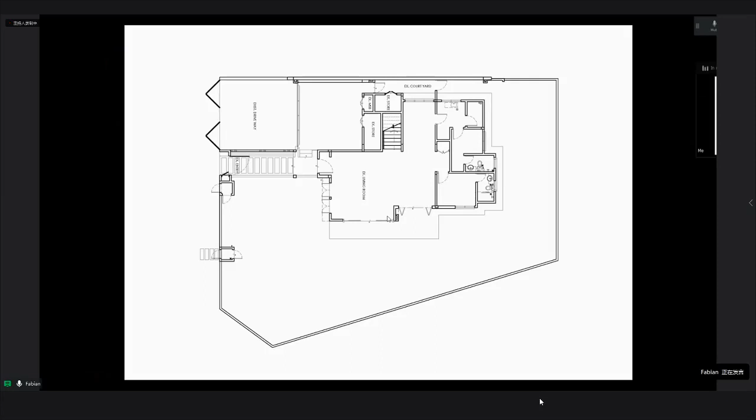That also gives some hint or observation to how we approach the house, because whenever I approach a house and the design, we don't try to impose any design on it. We usually let the site inform us of what it is that it wants to do.

If you go up to the first floor of the original house, it also consists of bedrooms and study rooms, but in a very flat kind of manner. As you can see from the original house, it's one level on the ground floor and another level on the first floor, and there's no real interaction between the floors.

So from these observations, I've come up with the design approach, which is to somehow try and separate or disconnect the building into two parts: one which is the bottom part here, and the other at the top part here.

We tried to detach the building and also create a kind of pavilion, a living space pavilion, which is the living, dining, and kitchen that faces towards the garden. When the line of the pavilion is in the same line as the skewed boundary, you create little spaces where light and ventilation can actually go through, to make the house more naturally balanced in terms of light and ventilation.

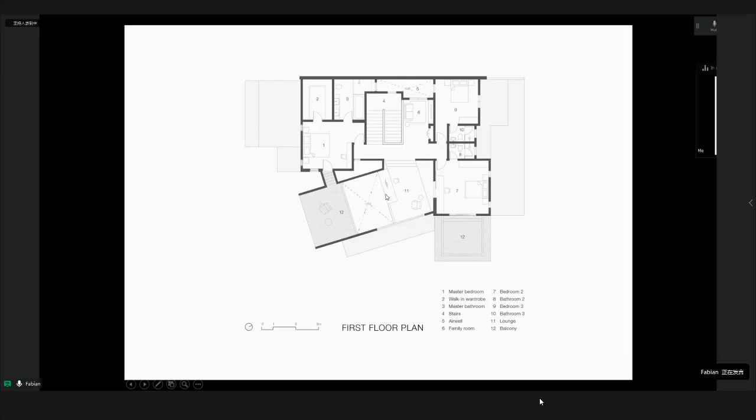The pavilion also has a series of levels here, which is the study room and the balcony area, which I'll explain later. So the pavilion has a disconnect, as you can see from this plan view right here.

There's also a small balcony area that extends towards here, and it becomes like a small little patio lounge.

As we turn around the corner, as you can see from the entrance area, it disconnects into this pavilion here.

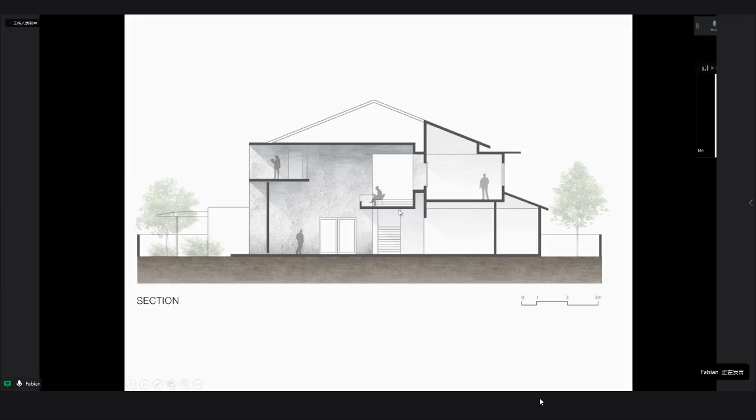This pavilion is made out of a series of platforms: one platform, which is a study room, on the lower side, and the balcony, on the higher side. This gives an illusion of an expansion of the space through different viewpoints.

This is the ground floor with the living spaces, with the large timber doors at the end of the space that open out and extend into the garden, to bring that view into the garden or to expand the space into the garden.

This is a view of the inside, with the study room at the first floor. And if you can see, it's a living and dining area, and towards the back side is the kitchen that comes out to a lounge area.